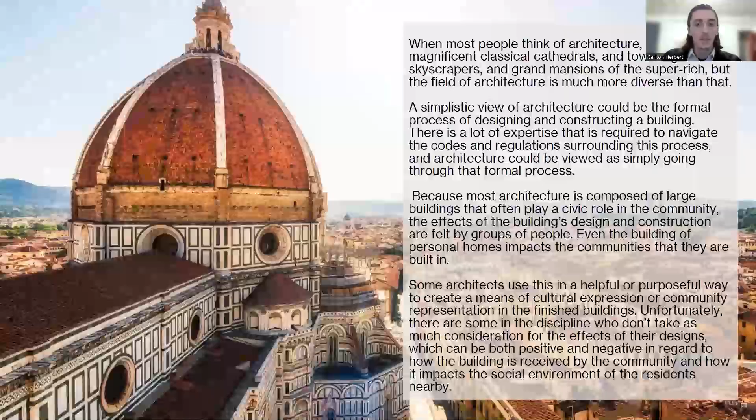When people think of architecture, I think of the grand buildings, large cathedrals, and such. But the field of architecture is a lot more diverse than that. One simplistic view of architecture could just be looking at the formal design process people go through when designing traditional buildings, or needing to know the various codes and regulations that tie into that. But architecture really is a lot more than that, and when you become an architect, you really need to know a lot more things than just that.

Most architecture is composed of large buildings that have more of a civic role. It's important to think about the effects that buildings will have on the entire community and how it affects groups of people as opposed to just individuals. Some architects realize and understand this and use it as a way to improve the community. But unfortunately, there are some architects who don't quite appreciate or understand how much of an impact their buildings have and how much they should focus on that.

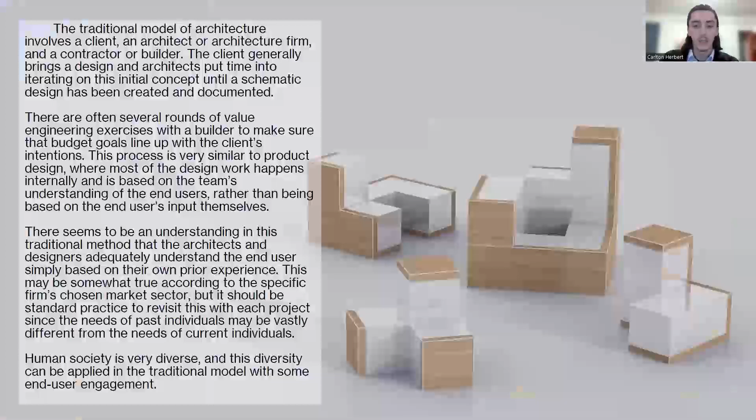The traditional model generally involves a couple of people, usually just the architect, client, and contractor or builder. There's usually a standard traditional design method and process that architects go through, creating several iterations and designs with final approval by the client. Most of this design work happens internally, and it's generally based on the architecture firm or team's understanding of the end users, rather than being really connected to the end users themselves.

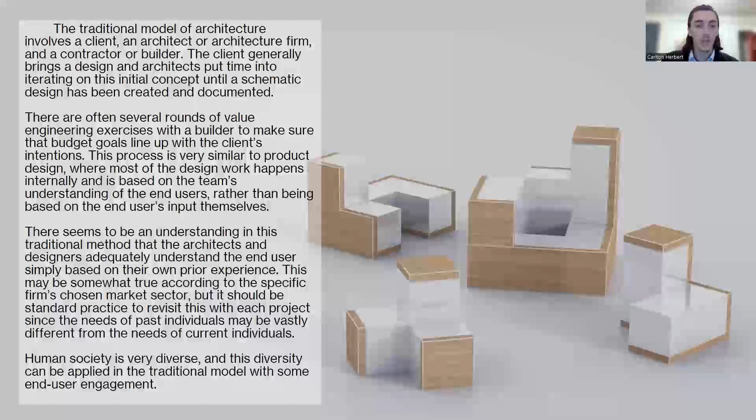There kind of seems to be this general understanding that architects and designers have the understanding of the end user they're designing for, because it's a problem or a project that they are familiar with, or a category they're familiar with. But really, each project should be treated as a separate project, and this should be revisited each time, just to make sure that architects really do understand the end user they're designing for.

Ultimately, it's really about finding the balance between the traditional model and more of an end-user-focused model. When you bring in end users too much, it kind of changes the role of architects from more of a design role to more managerial. It's not necessarily a bad thing, it just becomes a little more complicated, takes a little bit more work, and is not what most architects are necessarily comfortable with in their design process.

But this just means that it's a learning curve and adjustment that architects need to go through in order to involve end users more in their process.

I was able to find several examples of where this was successful, as well as where architects maybe tried and failed. One example of success that I found was this Granville New Homes redevelopment project. It was mostly successful because of the Glass House organization over in the UK. They put together workshops to train stakeholders and residents, bringing the residents in to become actual decision makers in the design process. They brought their own concepts, as well as worked through these workshops and training to progress the design concept in other ways.

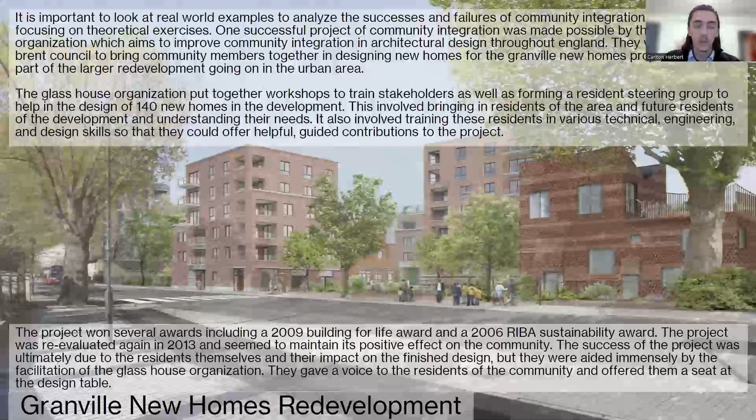So instead of just bringing in the general public and taking their opinions and considerations, they actually trained and worked with some of the residents and future residents of the area to really develop the ideas that they did bring, and build upon those. This project won several awards, including the Building for Life Award and Sustainability Award, which just goes to show that you can focus on multiple things, not just community-led architecture, and still have a successful project.

The problem was they brought in, I think it was 23 architecture firms to submit their designs for the homes, and they erred on the side of extremely modern and extremely sustainable, as opposed to what would fill the needs of the community members. And so most of the local residents were kind of taken aback with the designs, because they weren't really familiar with the designs that they were faced with.

But along with this, it also failed because of a lack of construction administration. They had brought in a lot of national firms that really didn't have local people they could depend on for construction administration and oversight, and so there was a lot of shoddy workmanship that went on.

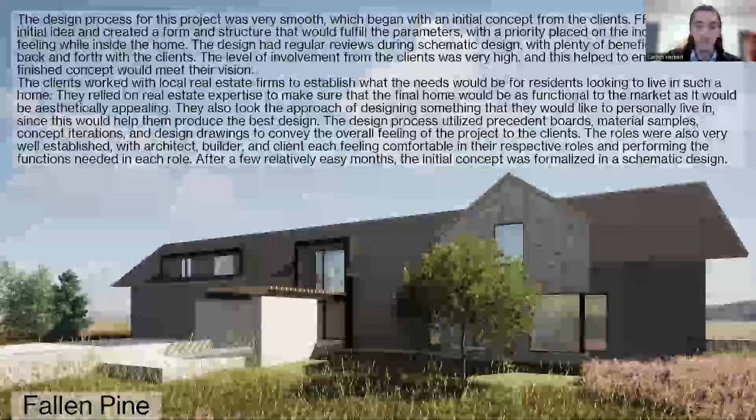I have some experience in high-end modern residential homes up in Jackson, Wyoming. So I just wanted to go over two projects, the design process for two of the projects that I've worked on. One of them would be this Fallen Pine project.

The project was very smooth. It was brought about by an initial concept from some clients who wanted to fill the role of a developer for the home to improve the community where it would be located. They worked really hard with a bunch of local real estate firms to nail down what the needs would be for a future resident of the area. But they also took the approach of designing something that they themselves would want to live in, so that they could really make it personal and try to come up with the best options in design and in layout.

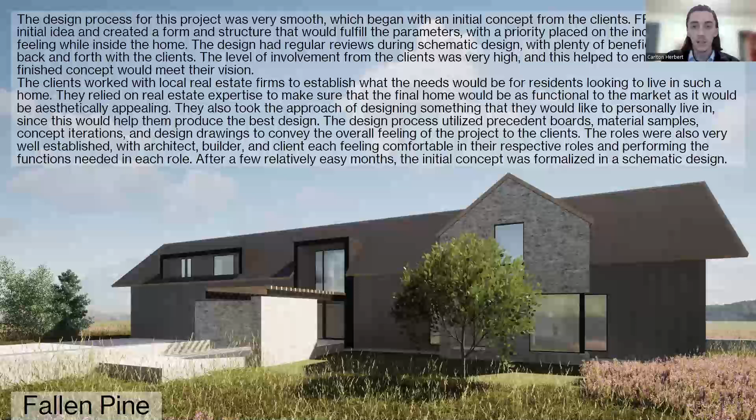The roles were very well established. The clients were familiar with the design process, and everyone felt very comfortable in their roles. And it really only took a few months to get through the design process.

Another project I worked on was this Ci Siamo project, and ultimately it was still able to go through the schematic design process, but the client was new to the entire process, which meant there was a steep learning curve. They also didn't have a very well-defined concept, so it was a lot more figurative and thematic.

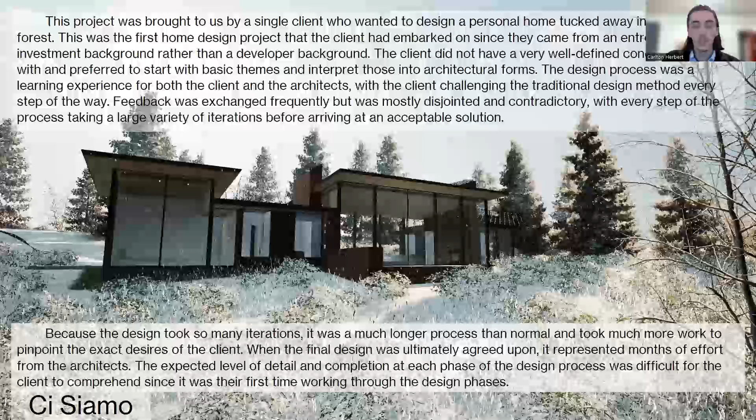Because they weren't familiar with the design method, they weren't really sure how to best contribute and how best to help with the design process and in providing feedback. So there was a lot of coaching and back and forth that needed to happen in order to train the client on how best to approach the design process and work smoothly with the architecture firm. Obviously, this was a process that took a lot longer, but ultimately, it was still able to arrive at a good solution for all the parties involved.

After looking at a mix of some of those public and private examples, it's obvious that there's much that can be done to improve the social impact of architects, both on the side of the architects and the side of the public.

Too many architects and designers attempt social improvement without a good base of knowledge and good expertise in the area. We need to try and involve end users, but we need to make sure that there's careful management and consideration from the design team, because ultimately architects are in charge of directing the project in a logical, meaningful manner. And you make sure that there are plenty of regular design reviews and some training of clients through that process.

Ultimately, architects need to learn to work with people, not just buildings. The field of architecture should evolve in a way that public perception of the architect's role is both executive and personal. We need to be able to relate to all of the parties that are involved in the process, not just become comfortable with more of the industry side on the developers and builders side, but also focus on who the buildings actually will impact across their lifespan.